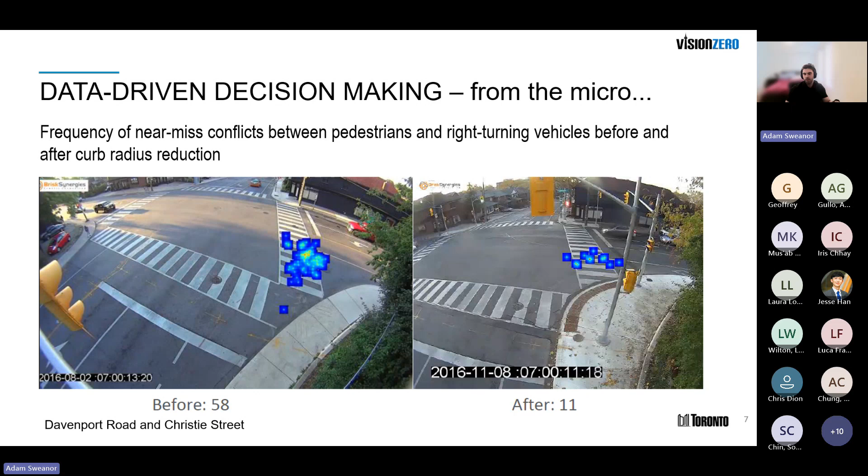Vehicles now make slower turns to navigate around that corner. There was 11 near misses, and this also shortens the crossing distance for pedestrians as they cross the street.

We also have data-driven decision-making at the macro level. So here we have our mid-block model, and this assesses all mid-blocks on roads classified as a collector and above, so all of the collectors and arterials throughout the city. This takes a lot of data input, such as census data, length of the mid-block, presence of TTC bus stops, number of streetlights, vehicle travel speed, and all of this factors into what causes or areas that have KSI collisions. What are the factors involved in that?

This is part of our proactive identification of where we may see KSIs in the future, and what can we do to make certain corridors safer before we have those KSI collisions.

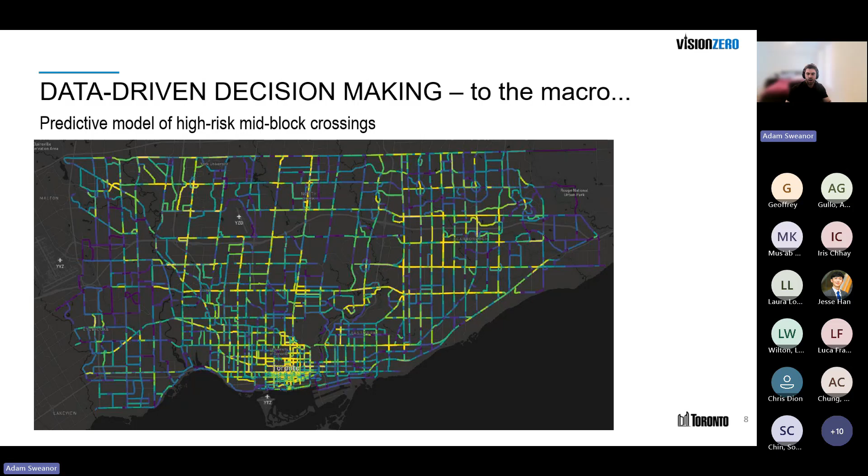This is a citywide model that could then feed into what I went over on the previous slide, such as the radii reduction. That would be on an individual basis at the micro level after looking at the macro picture citywide.

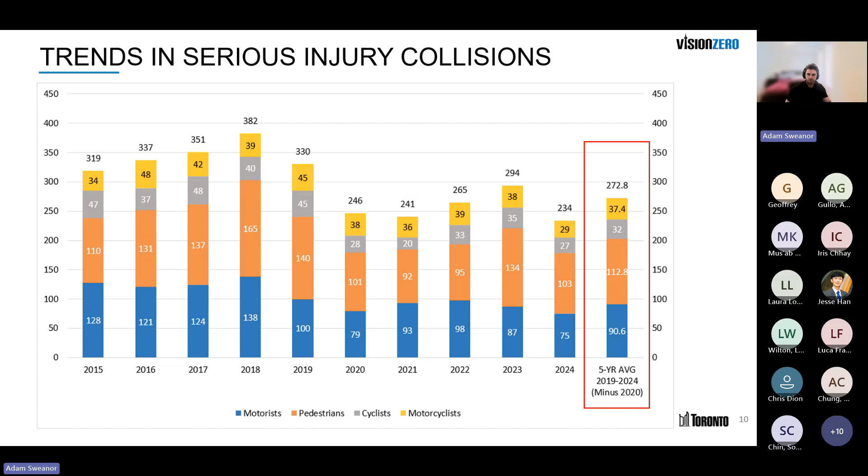Here's the same slide showing serious injuries. Just to look back to what I mentioned before, I have this slide. This was from our last fall council report on an update to our Vision Zero plan. This was a slide that was included showing the history of killed or seriously injured collisions going back to 2000 to 2024. You can see here that steady decline until we got to about 2011, 2012, and then that increase leading up to the onset of the plan.

On the bottom, the black are the killed, and then the gray are the seriously injured collisions. The line on the top is the trend line showing that we are trending in the right direction, but still have lots of work to go.

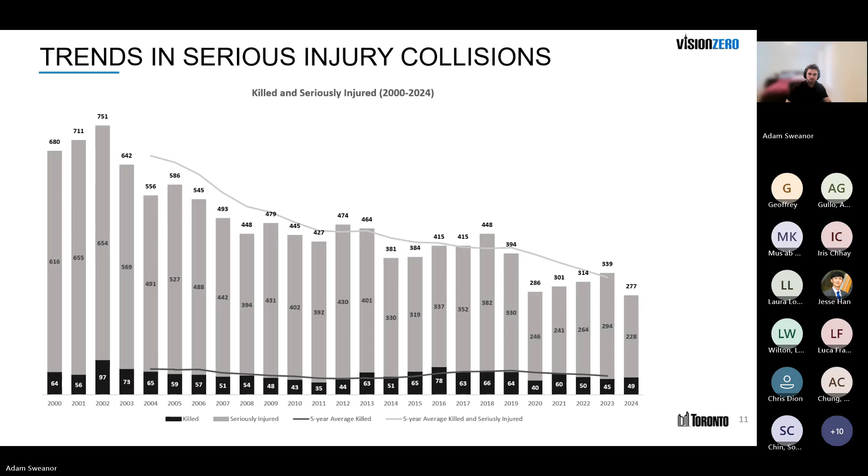So next, one of the biggest things is speed and the problem we have with speed. This graph shows likelihood of a fatality ranging from 30 kilometers an hour, where we are posting all of our local roads, up to 70 kilometers an hour, going from a 10% likelihood of fatality to a 100% likelihood of fatality.

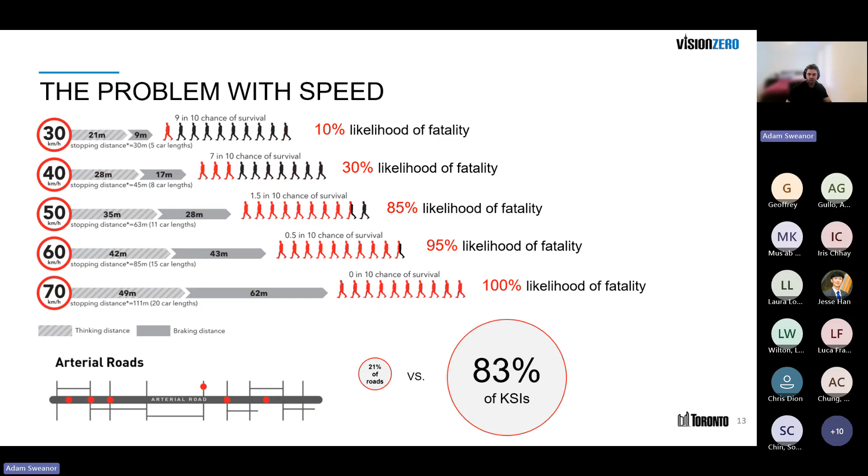So slowing vehicles on our roads is a primary measure that we take as part of our Vision Zero road safety plan. You can see on the bottom that arterial roads, the main thoroughfares, whose primary function is to move people throughout the city, such as roads like Bloor or University, make up 21% of our roads, but they make up 83% of our killed or seriously injured collisions.

As part of our work to prioritize safety, we look at where collisions are happening and the frequency of those collisions. This influences the countermeasures we prioritize and the work we do to enhance safety.

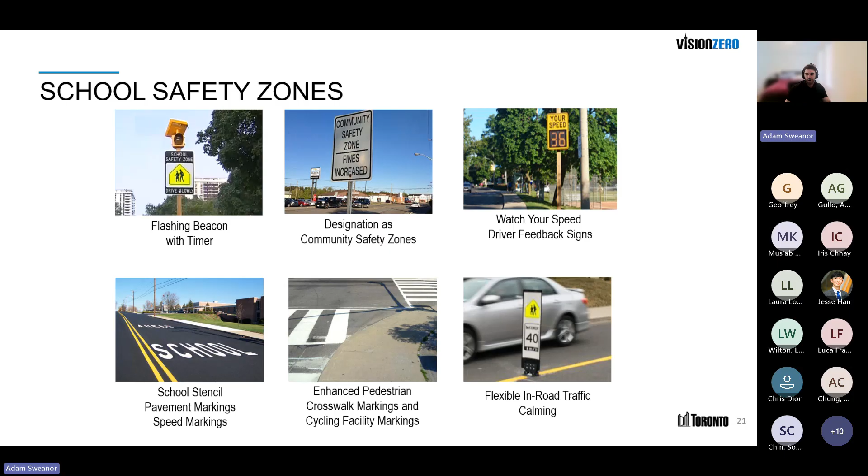So more information on the community safety zones. We're able to put in the automated speed enforcement. Currently, we have 150 of these cameras across the city. 75, so half of them, are allocated to each ward, so they are rotated about twice a year.

And then the 75 that are new this year from 2025, they're allocated citywide based on a data-driven process, some of which are permanent pole-mounted as demand requires. And these are primarily installed near schools.

Most of our community safety zones at the moment are based on that 2018 blanket-wide designation, the frontages of all schools. In 2023, we did make a prioritization model to enact community safety zones outside of school safety zones where there is a safety concern and an automated speed enforcement camera would be able to enhance safety in that area.

You can find on our website a study that was done with Sick Kids Hospital that looked at the efficacy of the automated speed enforcement cameras, and they found a fairly significant reduction in speeding and excessive speeding after the installation of the warning signs and then the placement of the automated speed enforcement camera.

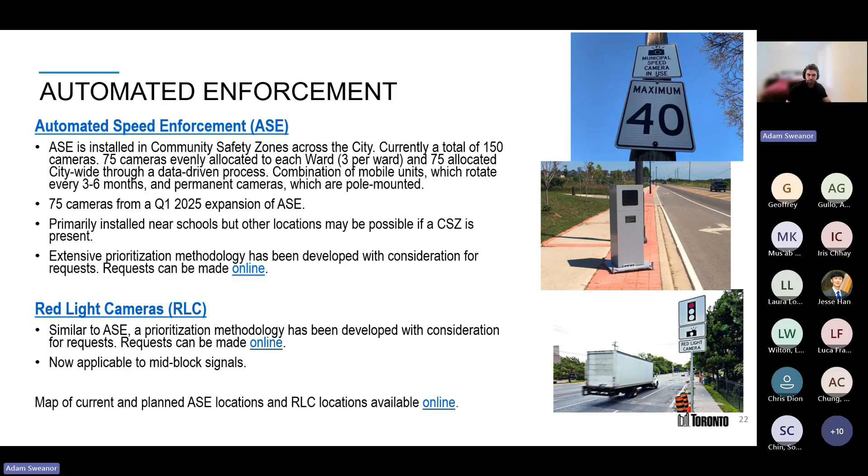On speed limit reductions, so what I covered at the start of the presentation, showing the risk on roads, we started in 2016 prioritizing the major arterial roadways and then the minor arterials. Those ones were a reduction for arterials that were posted above 50 to lower them to 50.

There were some exceptions, such as roads through industrial areas or in proximity to the 401. But overall, the vast majority of major and minor arterials were lowered to 50. Collectors that were posted above 40 were lowered to 40. And this all wrapped up in 2020, allowing us to shift our focus then to local roads.

So this started at roads that had the highest KSI collisions down to local roads that have the lowest, but lowering the local roads to 30 is currently ongoing.

Just to note for these ones, this reduction was a citywide blanket reduction in speed. This doesn't mean that we will not further reduce arterials or collector roads from this blanket-wide reduction.

These can be investigated by our traffic operations team and brought through with your local councillor. So in some cases, you may have a collector road that maybe operates closer to a local, or it is warranted to further lower that reduction. So that would be done on an individual basis.

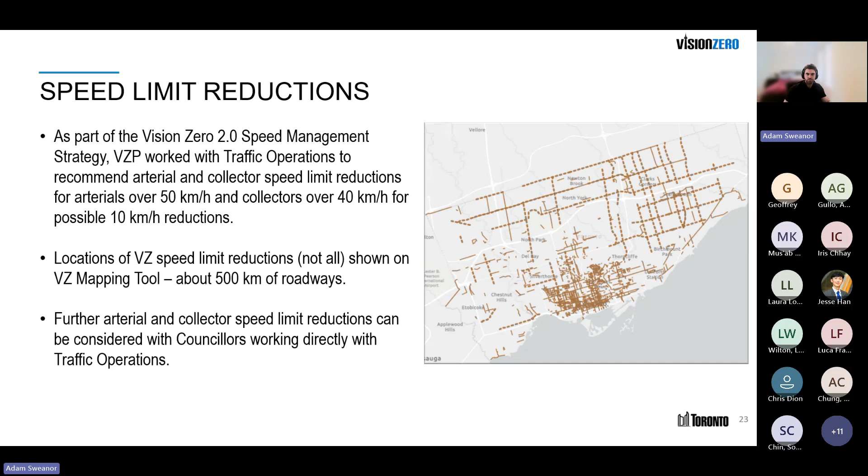So to elaborate on our speed limit reductions on local roads, this is what's currently ongoing, and with a planned completion date of 2028.

Before we had approval to do gateway signage, you'd see signs as you enter a municipality telling you that unless otherwise posted, the speed limit would typically be 50 kilometers an hour. That was updated, and now we can do gateway signage on a neighborhood basis. So instead of just one set speed limit across the city, we can look at neighborhood level speed limits.

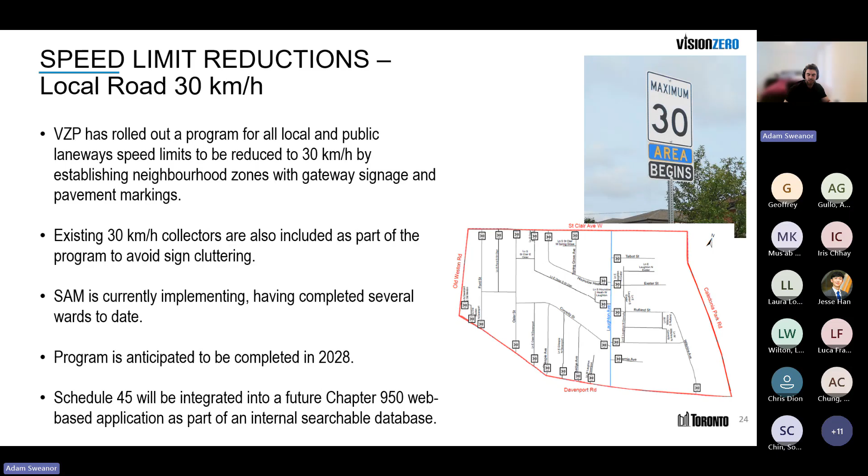This allows us to implement that across the Etobicoke, North York, and Scarborough districts. Toronto and East York was updated before we had access to gateway signage, to 30 kilometers an hour for all local roads. You can find this on our Vision Zero mapping tool as well, for the status of each ward as we work through them.

On traffic calming, the primary piece we've installed across the city is speed humps. These are what you'll see on a lot of local roads - a strip of asphalt installed across the roadway. These are installed to create an environment where it's uncomfortable to travel above 30 kilometers an hour.

Vehicles with a larger wheelbase, such as a bus, can travel over the speed cushion without going over the bump, but a personal automobile with a shorter wheelbase would go over this hump and get the traffic calming benefit.

So these are an additional tool. We did a pilot project on Tandridge Crescent. That evaluation was successful, and we are doing a broader implementation through our team as well as some of our other groups within the City of Toronto.

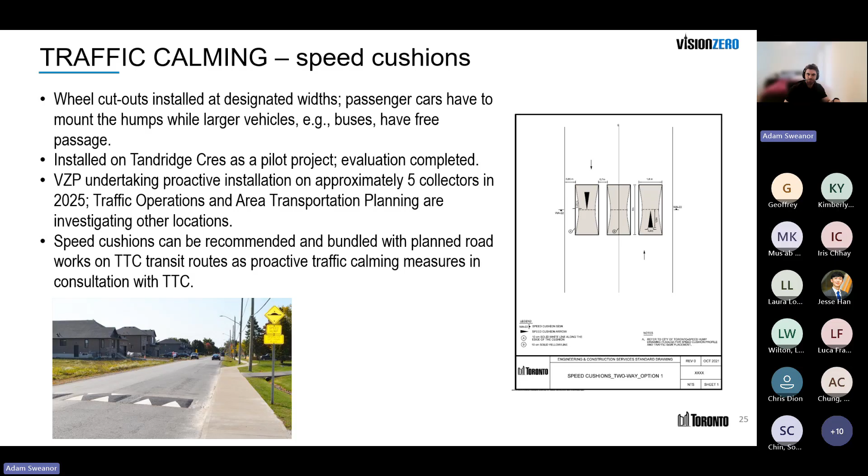Next we have our fatal vulnerable road user site investigations. These are in addition to - this is when we have a fatal collision on our roads. Toronto Police and Traffic Operations will go on site immediately, and they'll look at the causes for the collision and any quick remediation that can be done, such as enhanced pavement markings or other things that can be implemented quickly.

These fatal vulnerable road user collision site visits include various units within transportation services, as well as the Toronto Police and TTC when the collisions involve a TTC vehicle. This looks at more long-term recommendations - what could have been the nature of that fatal collision, and what could be done on a long-term basis to enhance safety and prevent future fatalities at this intersection.

We brought forward 50 new school crossing guards at various schools across the city, 170 new pedestrian head start signals - this is where the walk sign goes on typically 5 seconds in advance of the vehicle green - and 70 new school safety zones.

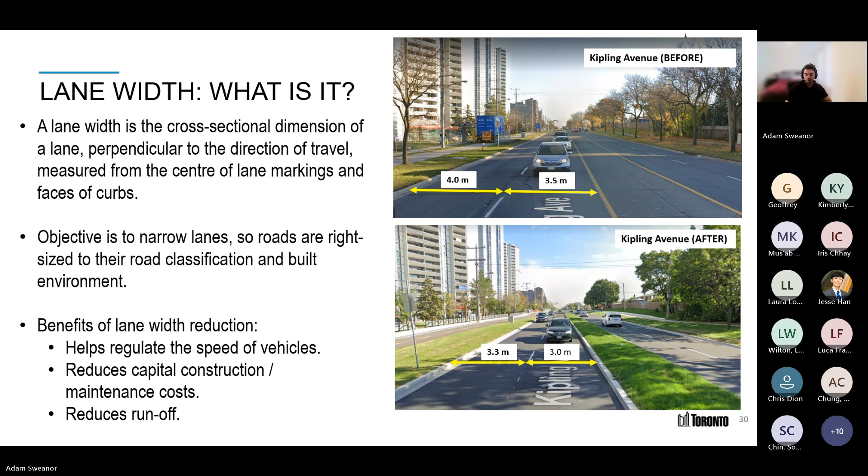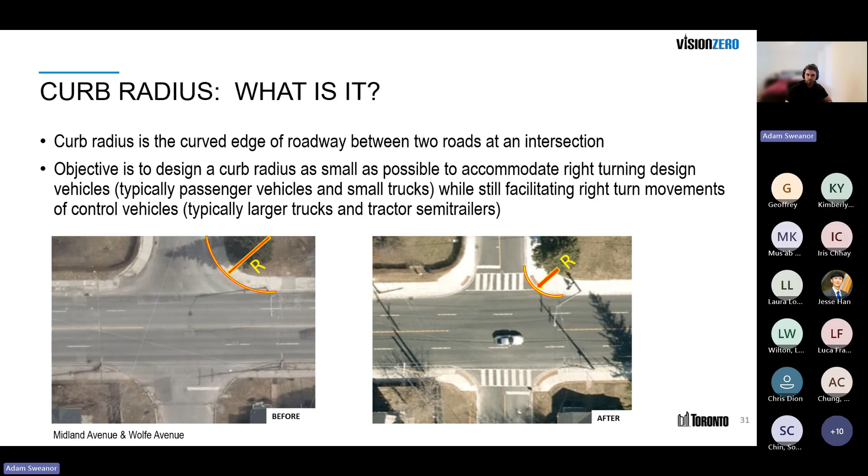Here we have a truck apron. In some cases, because we design our corner radii for design vehicles, a personal automobile would be able to take a much tighter corner than, say, a large truck.

In cases where we can't bring that corner radii to be as tight as we would otherwise like, we can put in a truck apron. That's the advertisement piece we post at all of our new truck aprons as part of education and engagement. This is a semi-mountable curb installed for a radii applicable to a passenger vehicle, but would allow a larger truck to ride its rear wheels over the truck apron to complete its corner.

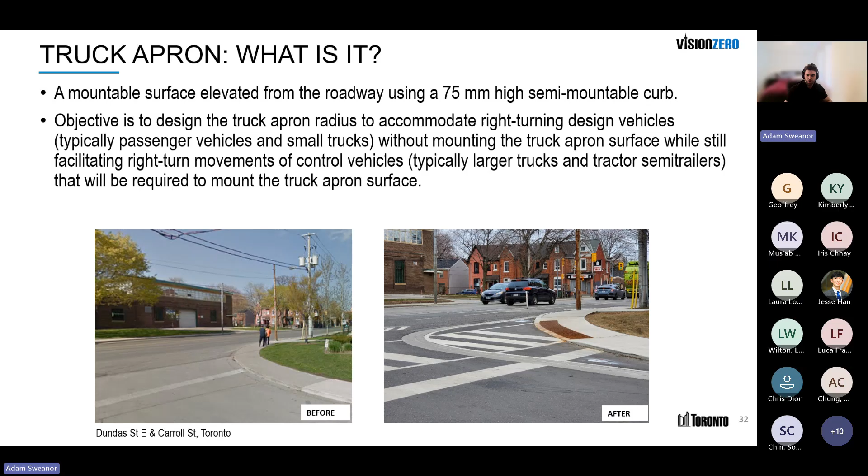Instead of just having signage that tells drivers they can't park in a certain area, now you have curbs that formalize that, increasing visibility at intersections and enhancing safety. These are typically done as part of road reconstruction projects, so when the road is being ripped up anyway, we can build it back better and in line with our current design standards for Vision Zero, since many intersections throughout the city were built before those standards were in place. These design standards are posted on our website and constantly updated based on changes in industry guidelines or lessons learned from other cities and jurisdictions.

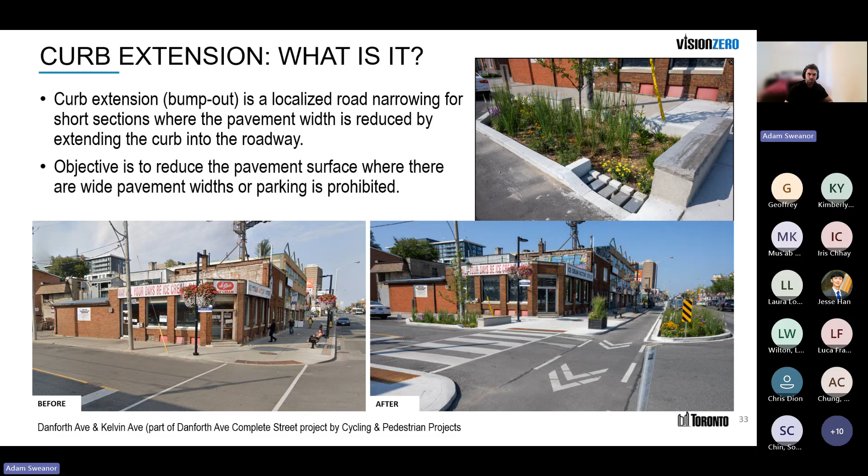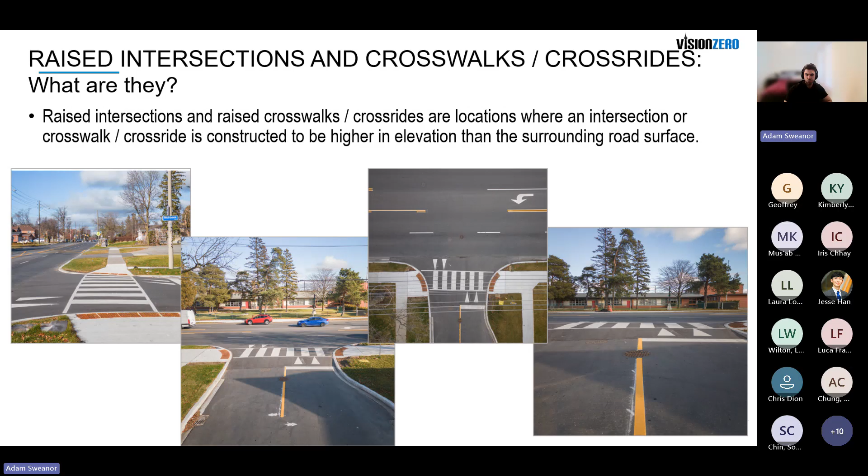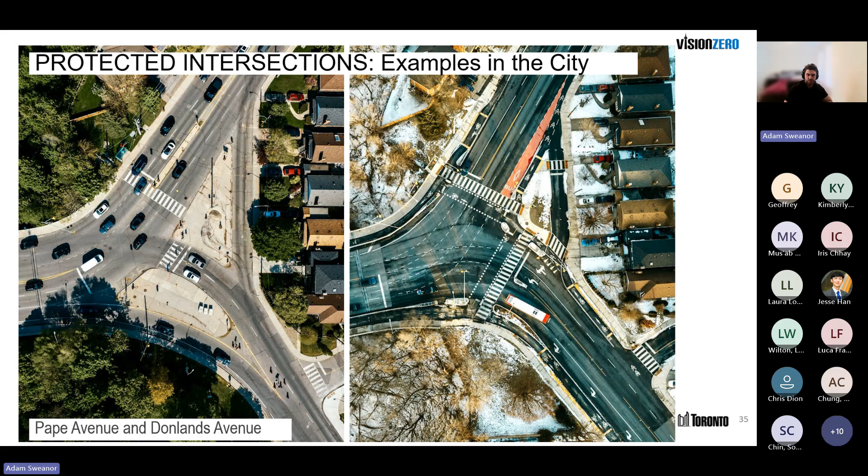We have protected intersections that are now being installed throughout the city. Here we have the Pape and Donlands intersection before you go over the Millwood Bridge. You can see the prior configuration on the left, and on the right bikeways have been introduced to cross the bridge, with dedicated signal phasing included to enhance safety for all road users. Now pedestrians can get to the south side of the road, where previously there was a slip lane that would not allow someone to cross from the south side to the north side, and the bikeways have bike signals as well as dedicated infrastructure that was not in place prior to installation.

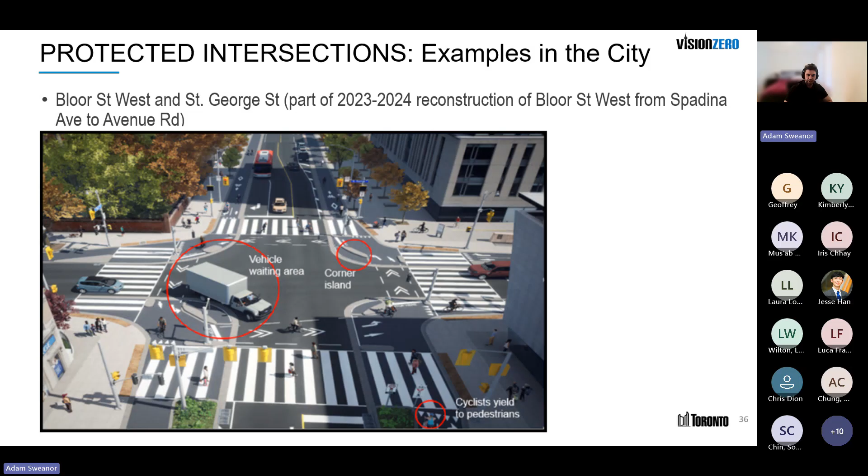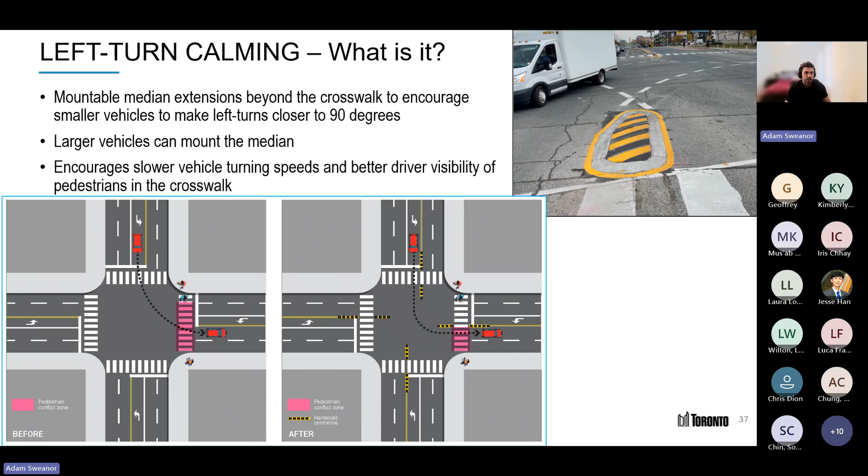The lane widths have been reduced again with paint and bollards. This means when that intersection does come up for reconstruction, it would follow similar geometry, but we can realize those safety benefits now. So in advance of construction, we can put in paint and bollards so the intersection is safer, and we're not just waiting for that road reconstruction event.

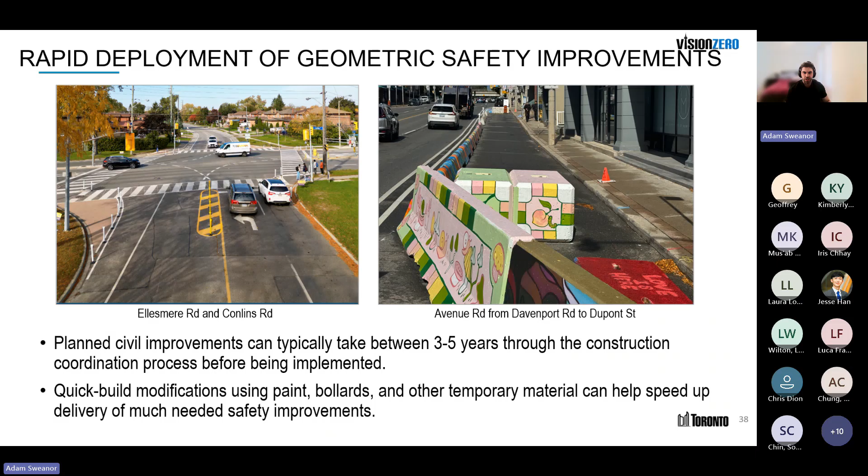And then in cases like Avenue Road, more permanent measures have been put in, like low walls, jersey barriers, and cement blocks to protect pedestrians in the area.

So that's the end of my presentation. You can find a lot of the information I shared today on our Vision Zero website. We have a mapping tool that shows all of our countermeasures that we've put in. It's updated regularly, as well as the Vision Zero dashboard, which shows progress on a lot of our measures. If you click on each of those, you can see more information on the year-to-year installation.

On our website, you'll see on the right panel we have an email, visionzeroto@toronto.ca. I'm happy to answer any questions after my presentation, but if any questions come up later or you prefer not to ask them in this forum, feel free to send us an email there. I monitor this inbox along with several of my colleagues, and we'd be happy to answer any questions.